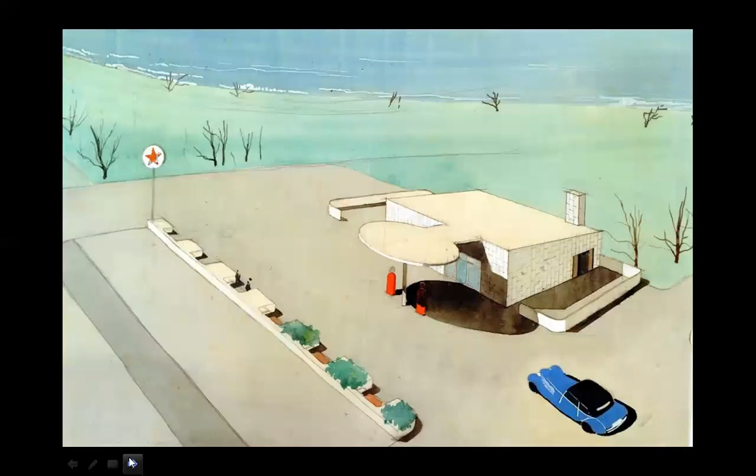Now, Bjarke Ingels is also Danish, and he said: I want to make a building as important, as significant as the opera in Sydney, which was also designed by a Dane, Jørn Utzon. He would not have said, I want to design a building like Arne Jacobsen designed - although Arne Jacobsen, in his more reticent way, was an equally important architect.

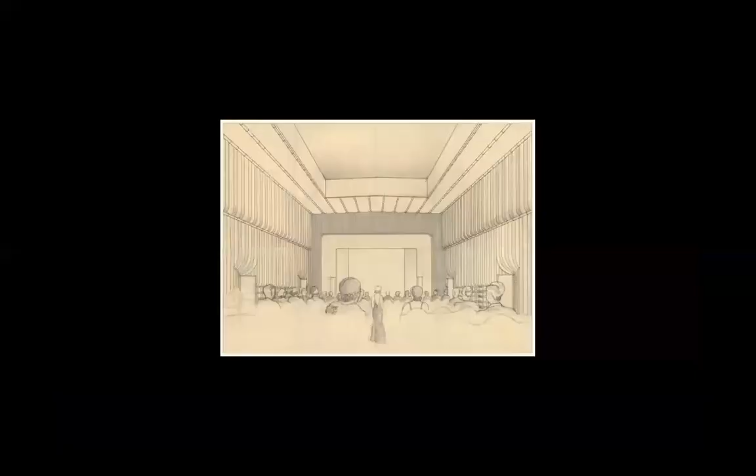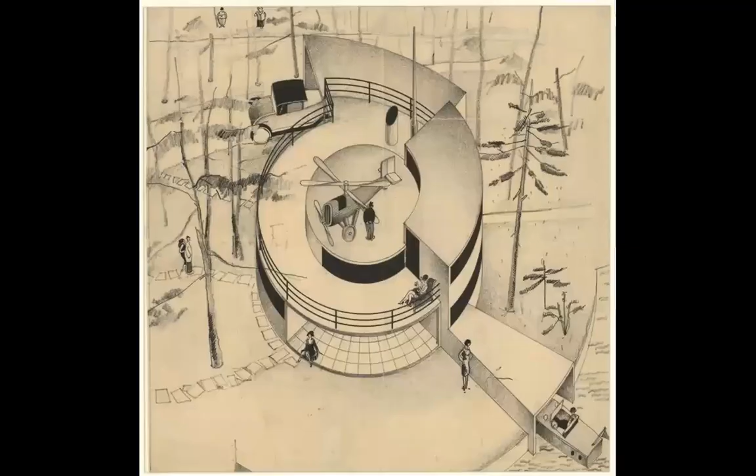This is a drawing for a gas station. We are going to see the building as well, for a cinema, for a hotel which was built, and - sorry about the resolution here - glassware. He designed everything: handmade drawings, of course, with pencil, a staircase, the building of the future, maybe. Here it is, the plan.

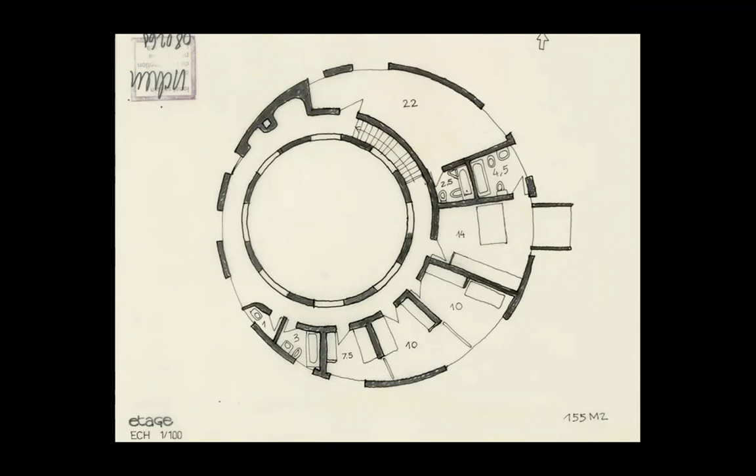So again, we are dealing with the architect as a dreamer. Even if he was a functionalist, he didn't stop dreaming. And what we look at here is, in a way, a dream. Another dream. Another dream. This one, I don't know if it is a dream, but this probably was to be a good building.

Now we start with this from 1932, Bellevue Beach. I don't know very well how to describe it. He designed this thing here, and it's an early work, but it is a little bit whimsical somehow.

Talking about the Danes, about Denmark, on my website, Icarch, I used in the about section a fragment from a film by Jean-Luc Godard, where he tells a group of students that in the Danish countryside, two great physicists were walking and came across the castle where Hamlet lived. The visitor said to the other, well, it's not so special, this castle. And the other said, yes, but when you know Hamlet lived there, it becomes immediately significant and important.

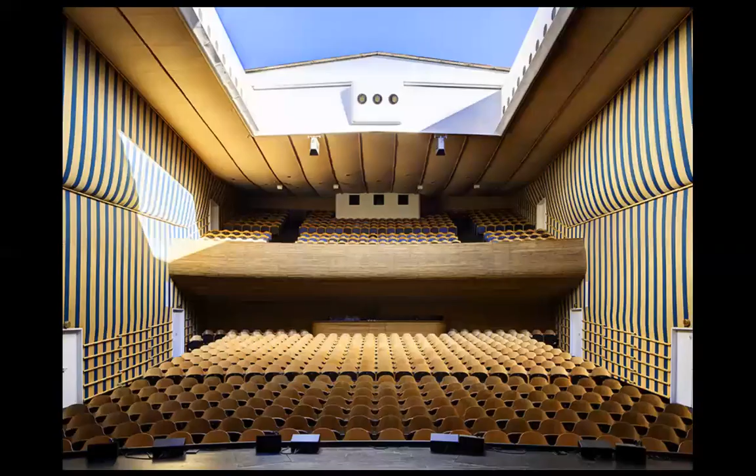Now the Bellevue Theatre, we saw a sketch, a drawing of it from 1935, 1936. Now we know how theater is written in Danish, almost like in English, with a T at the end. So this is an almost 90 year old theater. Look at the interior with that opening roof. I almost felt like saying, wow. It still looks very forward-looking. 90 years ago, before the Second World War, and it's still impressive.

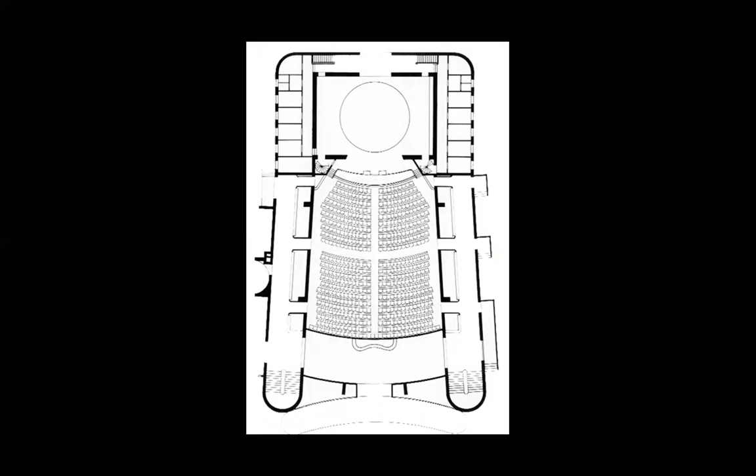And Denmark, as I said, has a great tradition in this field. In general, the Scandinavians are very good at furniture design, and maybe the Danes are the best.

This is a petrol station, a gas station, which we already saw in a sketch from 1936. Now you could say, why did he complicate himself with this canopy, supported by one single central pole, being so thin and so on. This is architectural acrobatics. But yes, it might be, but what would architecture be without these so-called acrobatics?

It wouldn't be architecture, you know. That's why I think the architect, as Doshi said, quoting Le Corbusier, has to try to be at least sometimes an acrobat, to do things nobody asks him to do, just for the pleasure of risking, or for the pleasure of forcing the unknown. Maybe one would have done it differently, but it still stands out. And otherwise, the building, prismatic as it is, is fine in its own terms.

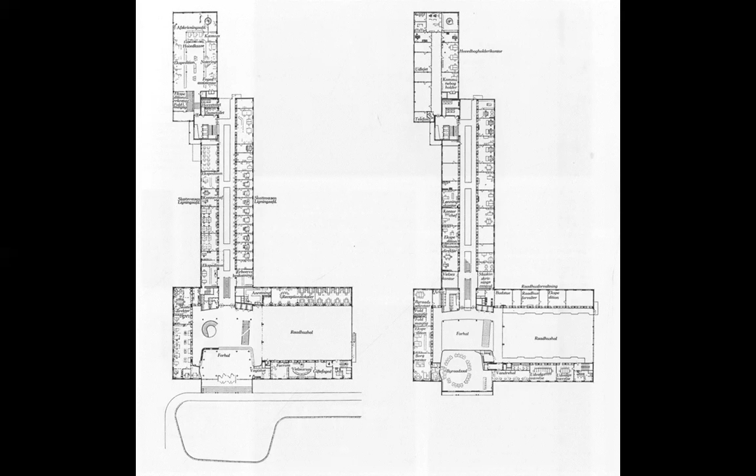So what we are looking at here is an architecture that might have pleased Descartes too—with straight lines, rectangularity. But if you look at the reality of the building, there are subtle things there that need to be noticed and that show grace. So you can do a good design. Indeed, I am continuously attacking the T-square and the rectangle, but you can do good architecture with them too. On the other hand, this was done 90 years ago or so.

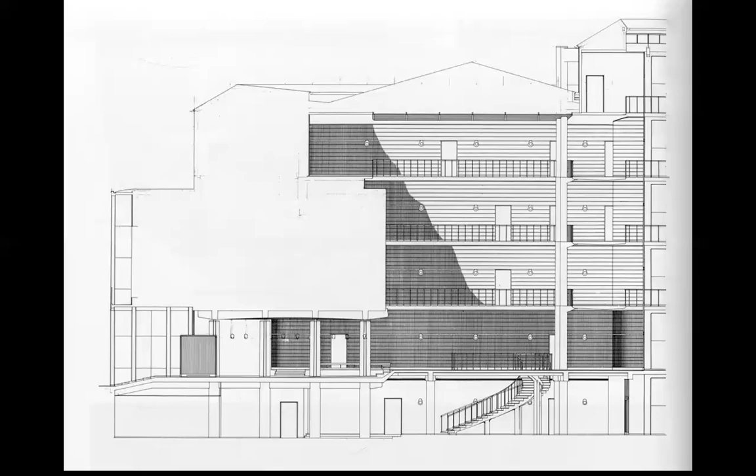I like these terraced houses too.

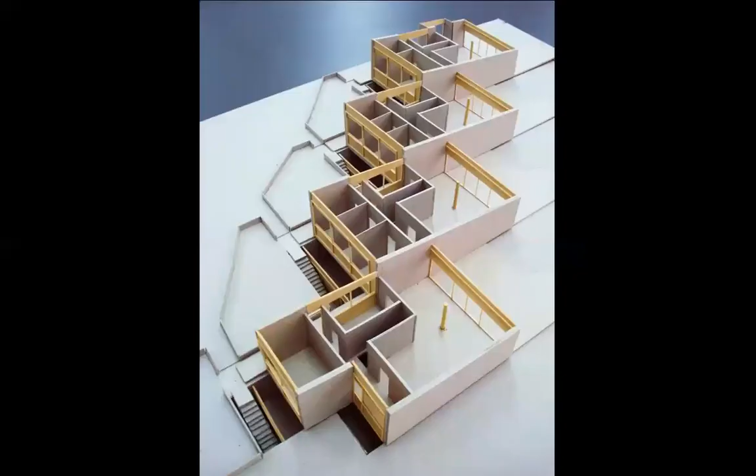You have to know that before I left the country, I published in Secolul 20 an article about Denmark, about the architecture of Denmark. It's a longer story, but I'm a little emotional because at that time when I wrote, I knew nothing about Danish architecture. I never went to Denmark, never went outside the country, but I studied through books and tried to write as well as I was able, and it was published in a beautiful volume which had the work of Jørn Utzon, another great Dane in architecture, the opera in Sydney, a dramatic picture of it. Secolul 20 is still, and was, and is, and I think will continue to be a guiding mark in Romanian culture. I've felt honored to have the chance to publish there.

So these are the houses that Arne Jacobsen built. They're simple, there is a rhythmicity, nothing obscure, but there is vigor. There is order, but there is also some variety or movement because of the way he planned this succession of buildings one near the other. You'll see them in the plan - they are not perpendicular to the street. This creates a dynamic architecture, even if it's based on repetition.

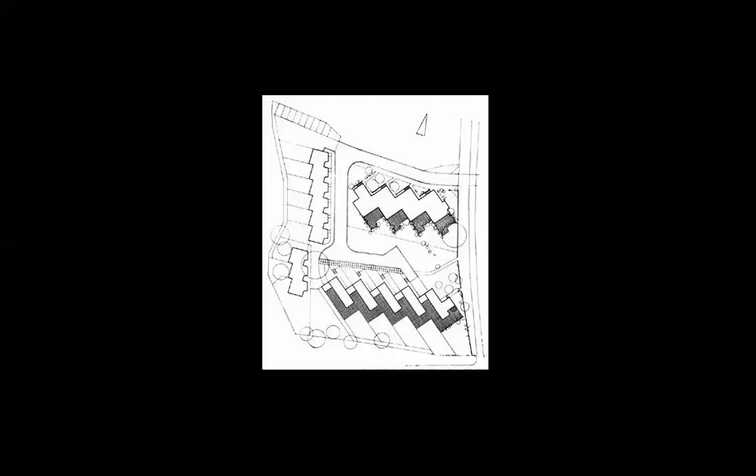And again, the reverence for brick. Brick is at home in the Scandinavian countries - not only there, of course, but much can be done with brick, just to build a wall of brick and not hide it, and it already has a richness. These are the plans - functional apartments with an L-shaped large living room, and on the second floor, the bedrooms, and so on.

And like in Frank Lloyd Wright and other important architects, fire is at the center - the hearth.

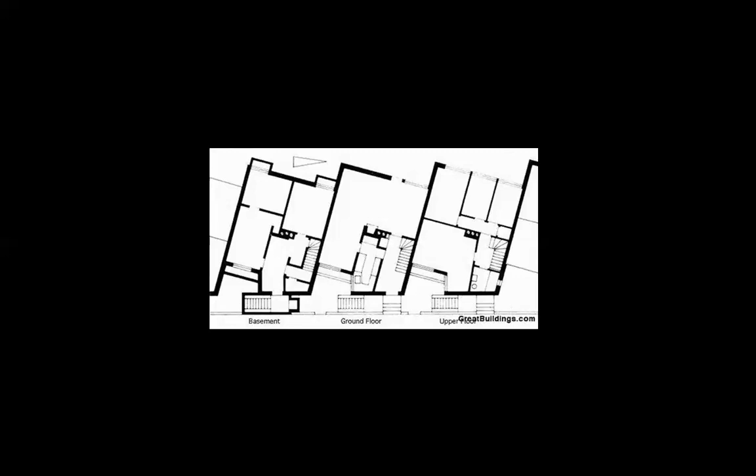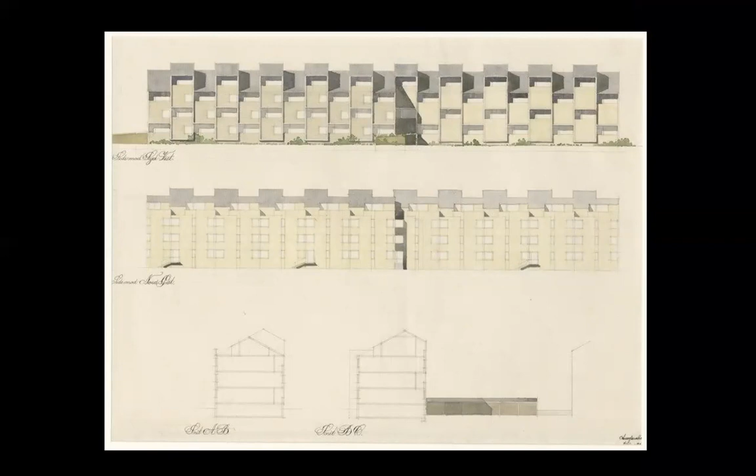Now, another town hall, I hope this one is the one that I like the most. Let's see, the Glostrup Town Hall, 1958.

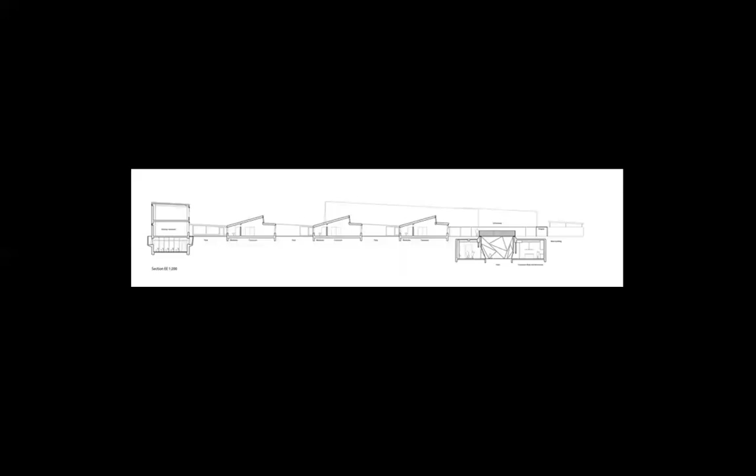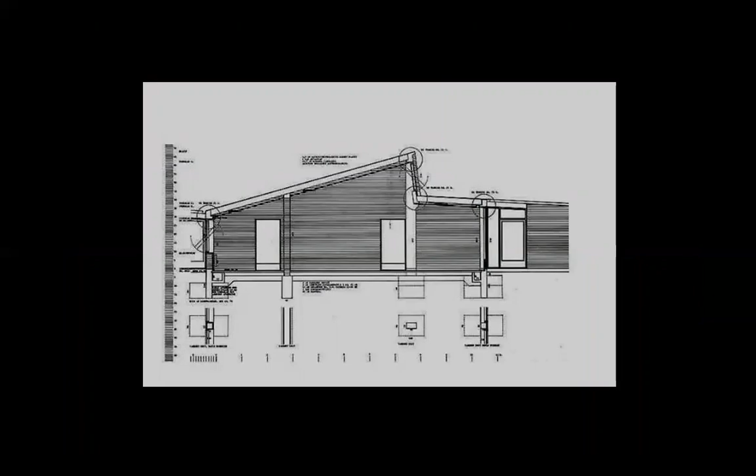It gives a sense of intimacy, of individuality. When the weather is nice, you can walk out of the classroom and enjoy even classes outdoors. It's a nice school, done with simple means, real. And the light comes properly inside the classroom.

Is it a modern school? Yes, it is. In terms of architecture, definitely so.

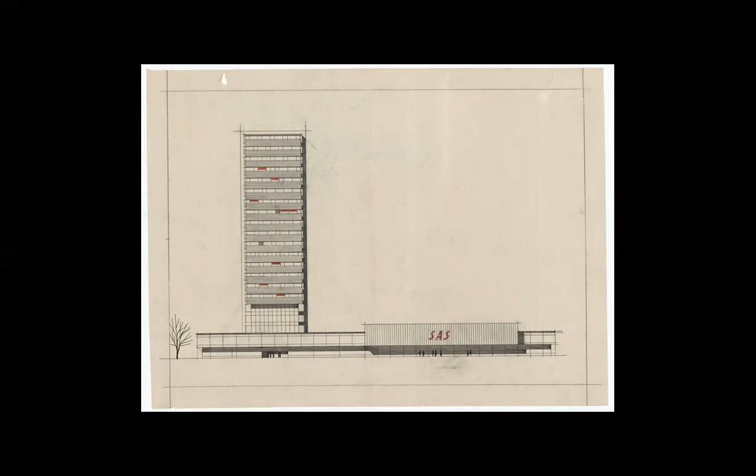Strangely, my experience of Copenhagen was not... I mean, I know they are considered to be the happiest people on earth, or some of the happiest on earth. But when I was there for a few days, I had the feeling that they were actually very nervous. But maybe I projected my own nervousness into them.

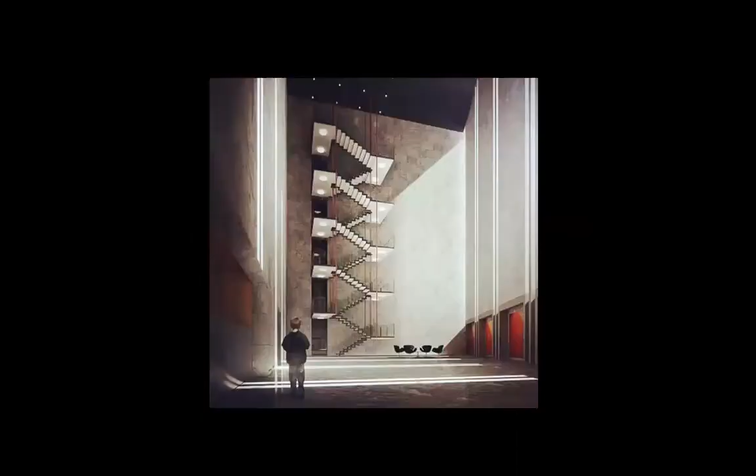The National Bank of Denmark, wow, 1965, 1970, and the bank it is. It's the National Bank of Denmark. Quite impressive, as banks should be, since money rules. It seems in rather dramatic ways.

But regardless of the function of the building, look at the subtle design in this tall atrium. And again, the staircase - he designed staircases magnificently.

With a few changes, this space could have belonged to a church or a cathedral. Maybe I'm getting carried away here, but there is something about the way the light enters the building, and the staircase itself is like going towards something that belongs to the beyond of life.

It's grayish everything, with the exception of colors. I saw other pictures. Sorry.

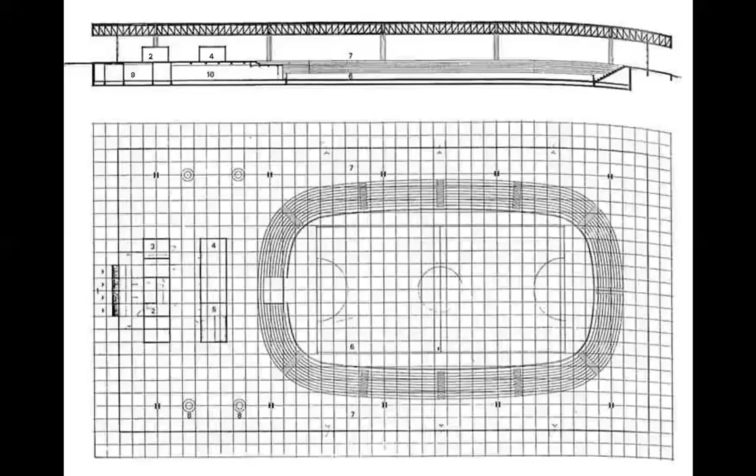Now a sports hall from 1965. It does look like a sports hall, it's true, in the sketches, and it does so also in reality, the built work.

Well, by today's standards, some of his works might appear to be a little bit dated because of being happy without a lot of expressivity or expression. Now he also built in Oxford, in the United Kingdom, for St. Catherine's College, because he was a famous architect. Maybe not too many people talk about Arne Jacobsen now, but mid-century, in the 20th century, he was a force in architecture and design.

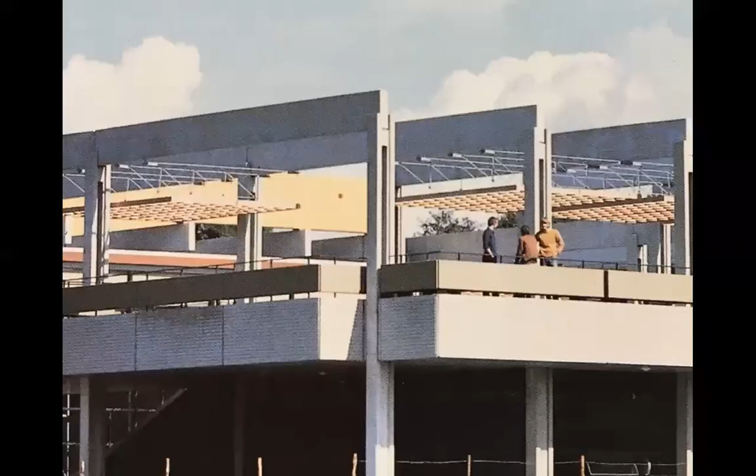Now, another school from 1970 to 1971, a bigger school. Well, this is what happens when education becomes an industry. What we look at here, it's not a chocolate factory, it's not a factory, it's a school. But its scale is, it's done exquisitely, it's true in terms of design, but still a very large building.

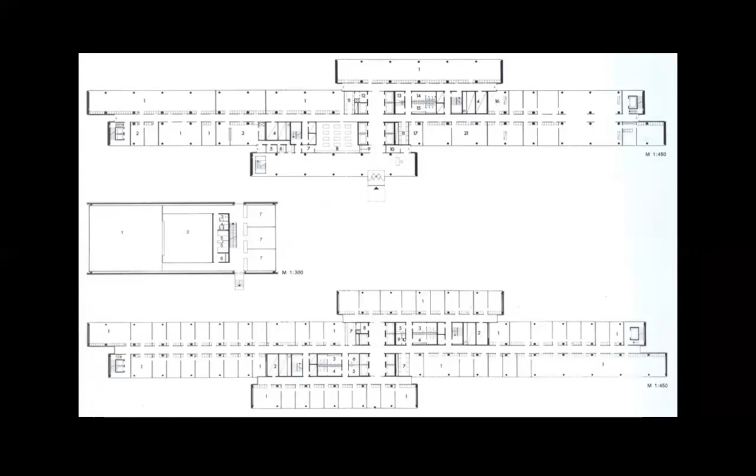Hamburg, 1970, buildings become bigger and bigger. Capitalism progresses, Europe distances itself from the Second World War, and that's what we look at here. Larger and larger buildings. Still gray, but still elegant.

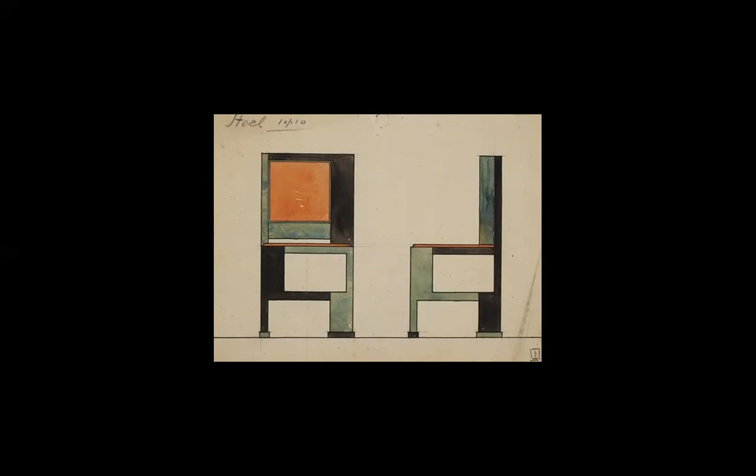Again, the architect loves to design chairs, and chairs love to be designed by architects. Now we look at a building which does not exist any longer.

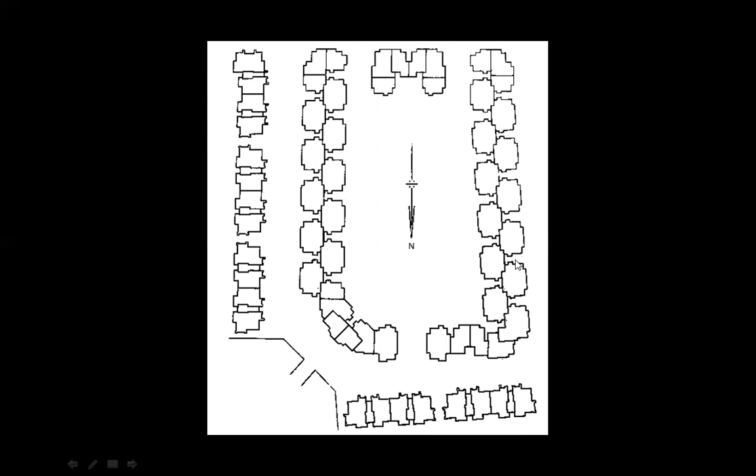Here is the site plan. I once tried something similar myself, where I connected the buildings at the corner through balconies. Here he does a little more than that. I don't know exactly how, but he solves problems of light here, even of ventilation, because these spaces are rather narrow. But since they are not tall buildings, I guess it works.

Jan Wils, a former member of the De Stijl movement. The De Stijl movement, which is so famous, but Theo van Doesburg was not an architect. Piet Mondrian was a painter, and Gerrit Rietveld was a cabinet maker. So it might be that Jan Wils was actually the only architect, though I don't know if he received training as such, as it is today in architecture. And we are talking about a major art and architecture movement, De Stijl.

Some of them did build buildings, including Theo van Doesburg. Piet Mondrian didn't build, but he painted cathedrals when he was younger, and has some very moving paintings before he arrived at his well-known verticals and horizontals. He always painted cathedrals and trees, churches, village churches, whatever - cathedrals and trees.